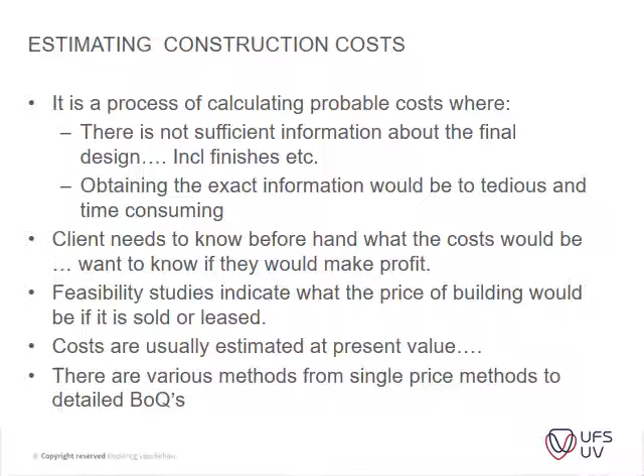and everything here still stays the same. So as you go through Chapter 5 of Maritz and Sigley, the Green Book, I'm just going to scan through these. You can just go through the theory. Please read it through, and go through the whole book once you go through the slides.

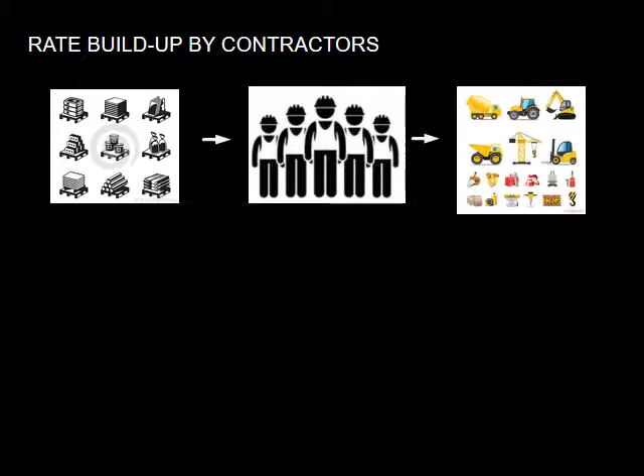Okay, so the main thing about rate build-ups for the contractor is firstly you have your material, then your labor, your costs, and then you have your plant that you add to that, and then you add a cost of time to those items, then you add a percentage for downtime or anything like that to get to your profit or your rate. And also on the percentage that a contractor might add is a profit margin. So basically you take your cost of all your labor, plant, and your time costs, and then you add a percentage to that to calculate your rate.

Okay, so this is more or less a theory. I'm not going to test you guys on this too much in this subject. We might look at it a little bit later on, but at this stage you'll probably get your rate from historical data, and if you do not have rates, you can get quotes from suppliers and so on, and then do the rate build-up as highlighted here in this slide to get to a relative rate. So you can use your discretion on that. I'll just basically look at whether you've applied the thinking method or rationale behind actually calculating your rate. Okay, so that's with regard to that item.

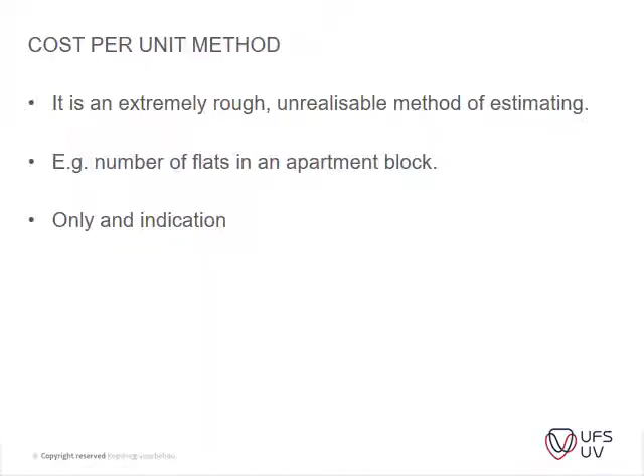Then cost per unit method. I'm just going to run through this. You've got your square meter method. Most of you should be able to get the idea from the theory bit on this, because the example that I've posted a video on actually contains most of the explanation of how to actually use or calculate the single price method. So this is a bit of a recap for most of you. You've got your unit method, you've got your square meter rate method, and you've got your cube method, and then you apply your experience whenever you do your calculations.

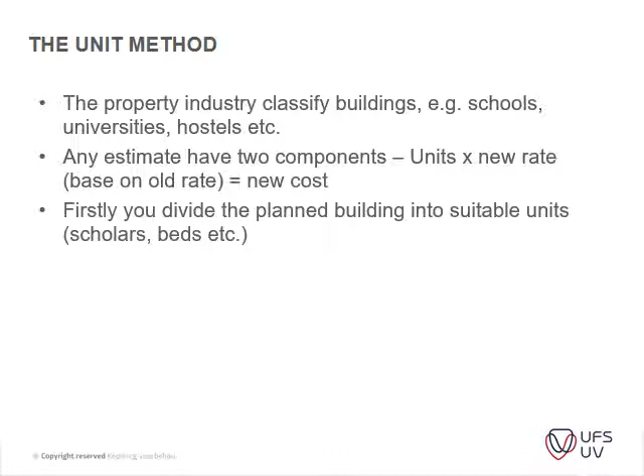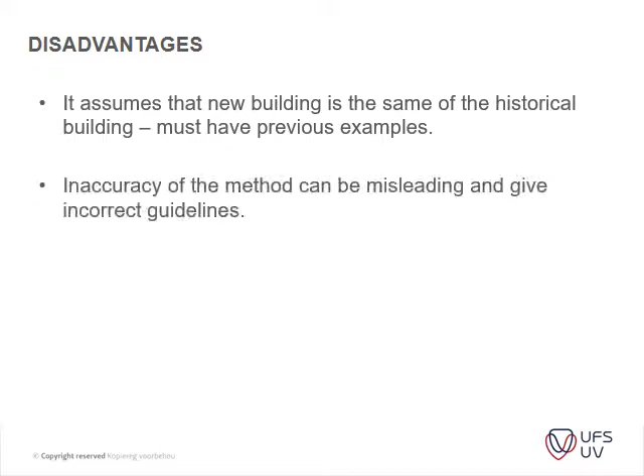Okay, so unit method is basically where you have a certain amount of units, your historical data you use to calculate a unit rate, and the example that I've used in the slides was just a hospital where you've got a historical cost of 80,000, you had 8 beds in this unit, you just get your rate per bed and you apply that to your new building. Okay, then you can go through your advantages by yourself. It's all theory. Disadvantages, same thing. Then your possible applications, also theory that you can go through.

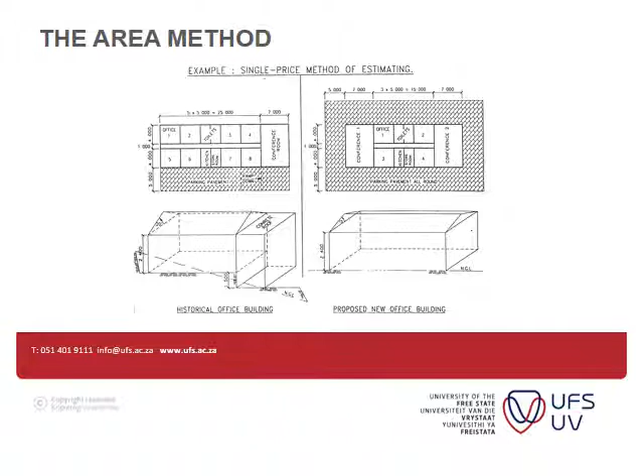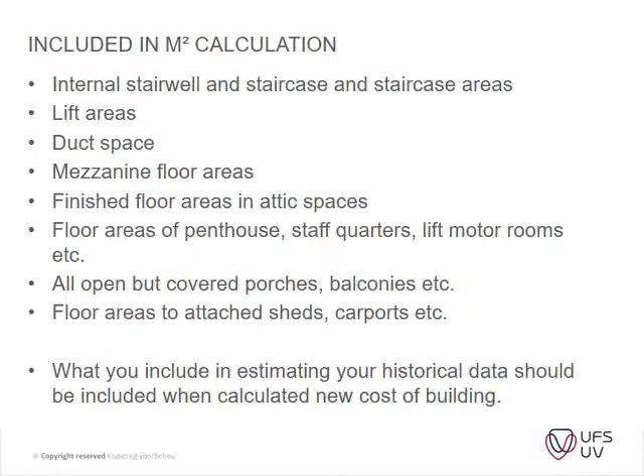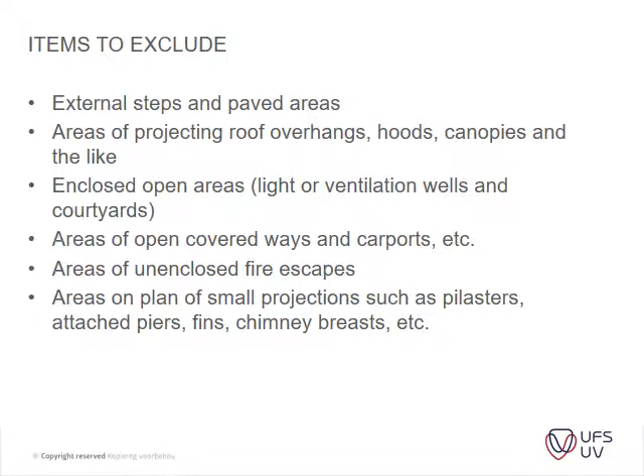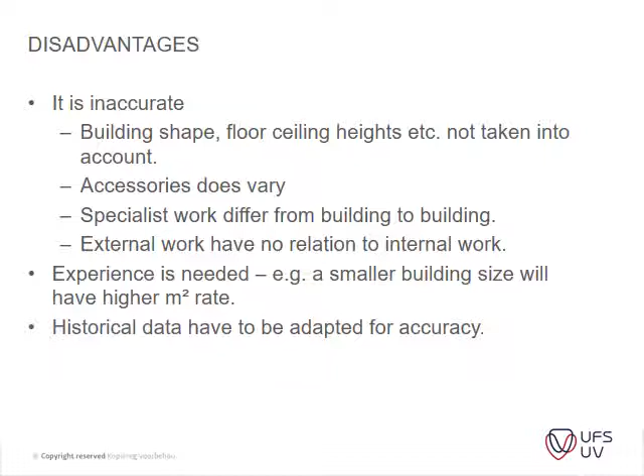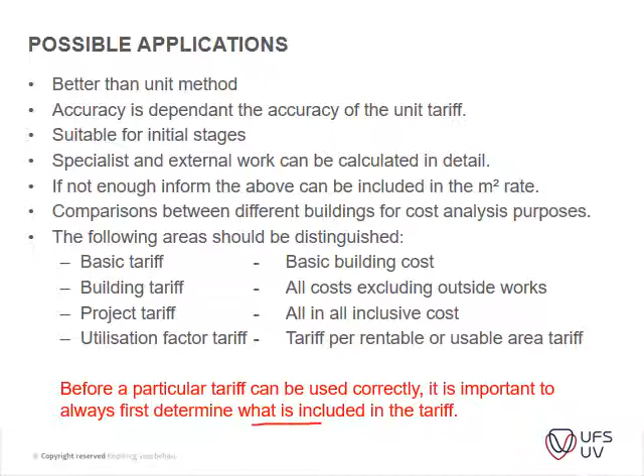So again, you can go through your example 1 of appendix 1. Here's just the calculation, same building, calculated the area to get a rate, and then your cost of your new building. You just take the area and you times it with your rate to get the new estimated basic cost. Okay, so the advantages again is theory. Before a particular tariff can be used correctly, it is important to always first determine what is included in the tariff. This is very important to take note of. Okay, then the cube method.

I think this is the one that I got the most questions on, and the main thing about this is you will see in your appendix 1 and I think it's appendix 1, there's a little section of reading work, and this is actually how the formula works. So there's two options with regard to your cube method. If you've got a flat roof, for your height of your building, you basically take the top of your foundation up to 600 millimeters above your roof, and that is your height that you times with your square meter area of your building to get the cube or volume of your building.

Then the other formula is the same. If you've got a pitched roof, you take the middle of your pitched roof height down to the top of your foundation level to get your height. The main reason this formula is implemented is to get to a point where you can actually compare apples with apples, and taking it slightly up in your roof is just to include the roof construction in your calculation. It's just the allowance that is built into the calculation of the volume of your building.

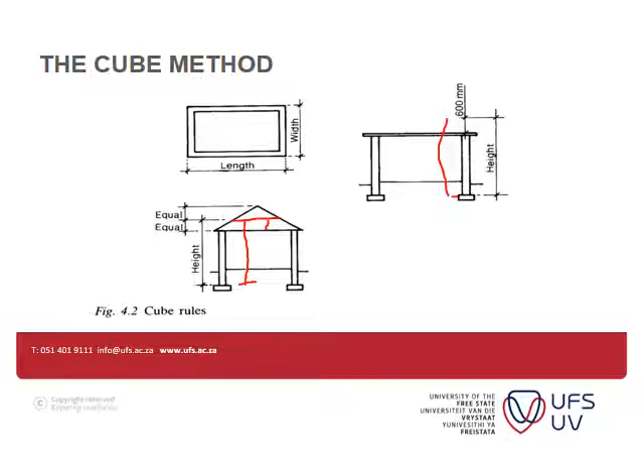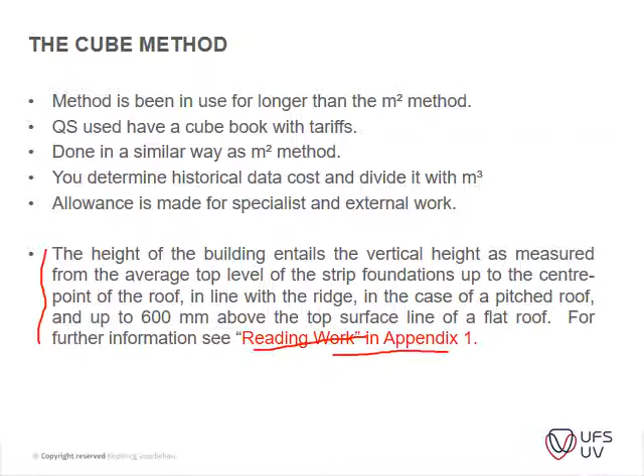Okay, so here's all the theory. You can go through that. Here's the formulas explained, and then you can look at the reading work in your appendix 1, and you will actually see how that formula works. And in the example, I also explained that. Your example, again, you've got your 80,000 Rand divided by the volume of your building to actually get to the 90.06 per cube, and then you just times that rate with the volume of your new building to get a new basic cost. Okay, then again the theory sections.

So please go through this. Please have a look at the lectures of the examples. Those are the most important ones that you need to try out. But if you do struggle, please do not hesitate to email me, and I'll try and sort it out.